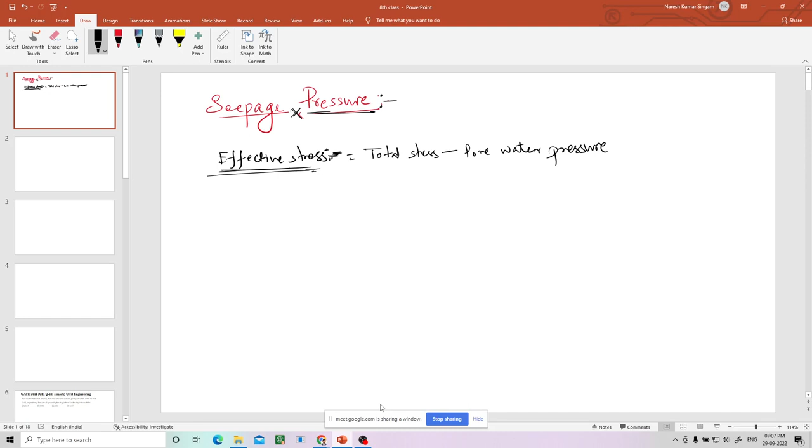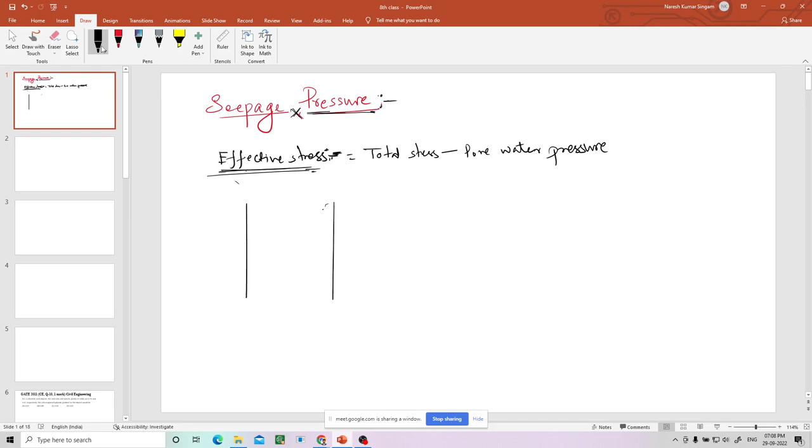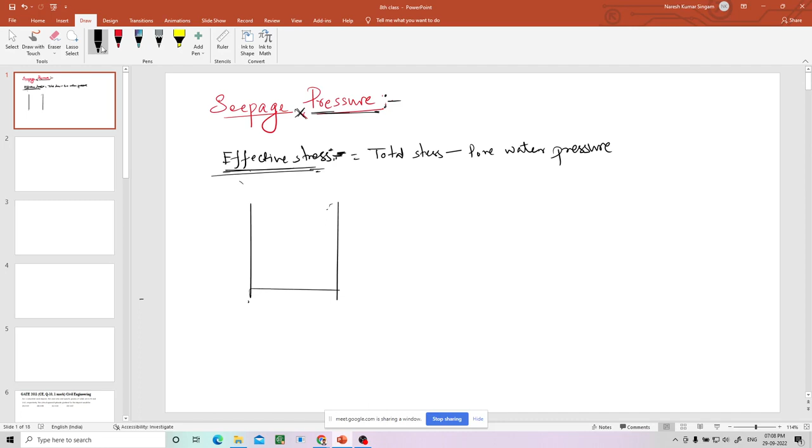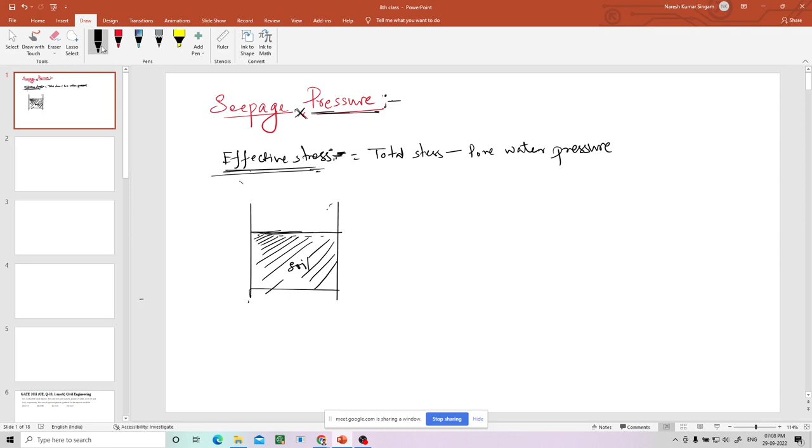Let us consider there is a soil here. This is soil, and above the soil we are keeping some water. This water can flow through this soil because it is fully saturated. That is the reason why you are able to stand the water here; otherwise it would have percolated inside, right?

So now as the water is standing above the soil sample, that means soil is already fully saturated. Now if you go for a tube here, this height, let us say, is capital H, and this height is HW, because this is the height of water which is standing above the soil. Now it is fully saturated.

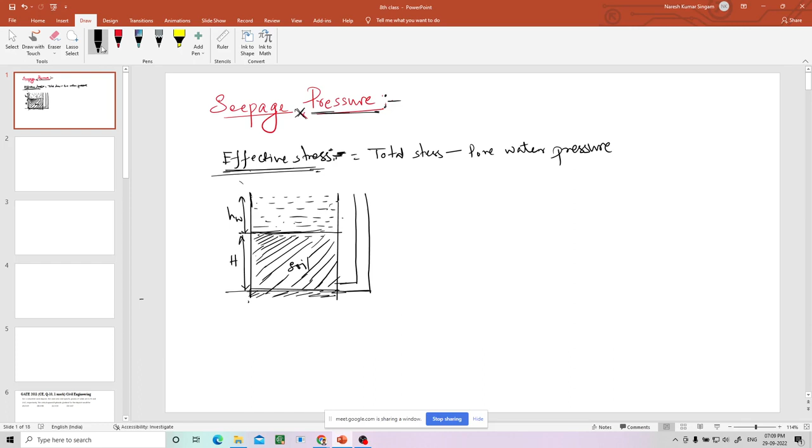Let us take a point here which is A. Can someone tell me it is fully saturated? That also I am writing here: fully saturated, having saturated unit weight gamma sat.

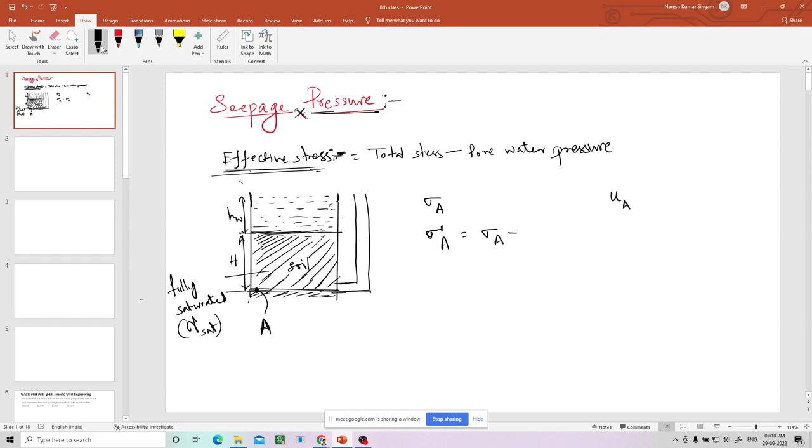Now can you tell me what is the total stress at A, effective stress at A, and pore water pressure at A? So how do you get this effective stress at A? It is nothing but sigma A minus UA, right?

So can you tell me what is total stress, someone of you? You have to respond fast because we don't have time, we have only one hour, within that I should finish all these things. Okay: gamma W into HW, plus gamma sat into capital H. Yeah, this is total stress at A.

Can you tell me what is the pore water pressure? Gamma W into capital H plus small hw. Yeah, this is the pore water pressure.

Now can you tell me what is effective stress? Gamma sat into... okay, so here what should I write, capital H or small h? Capital H, right? So I hope you understood the concept of effective stress.

Now another question from this concept. Now if I put a tube here, definitely there will be water flow from here because it is fully saturated and it is opened. So till where will it be filled in this tube? I don't know up to which height it will be filled, but what is the height of the water which will be filled in this tube?

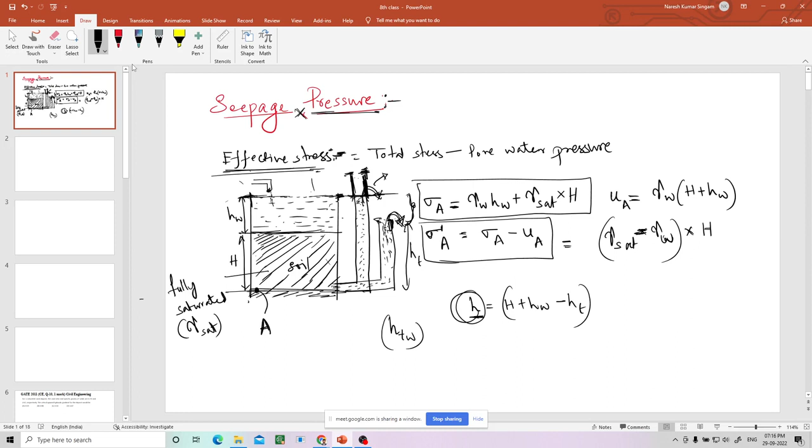Now you understood the basic concept which we should have before going for the seepage pressure. This is called no seepage. Let me go to another new slide. So no seepage we will discuss first. This is no seepage.

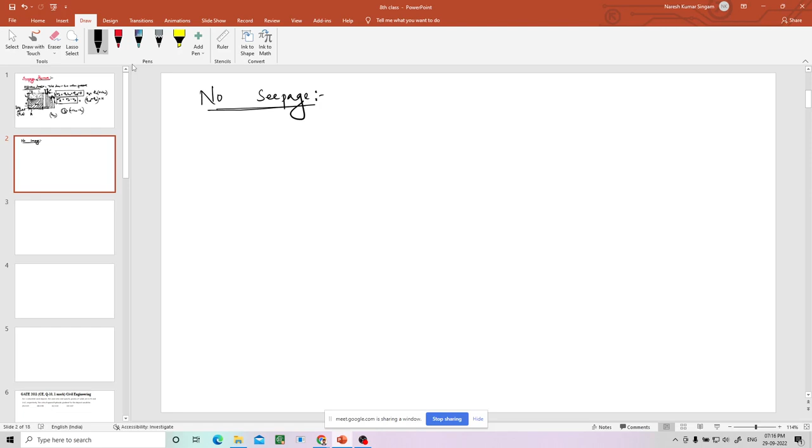But basically there is some water and there is soil. Below this there is completely soil, this is only water. Now I am taking tubes at different levels. The tube height is whose height is more than the height of the sample container. Now the soil is fully saturated.

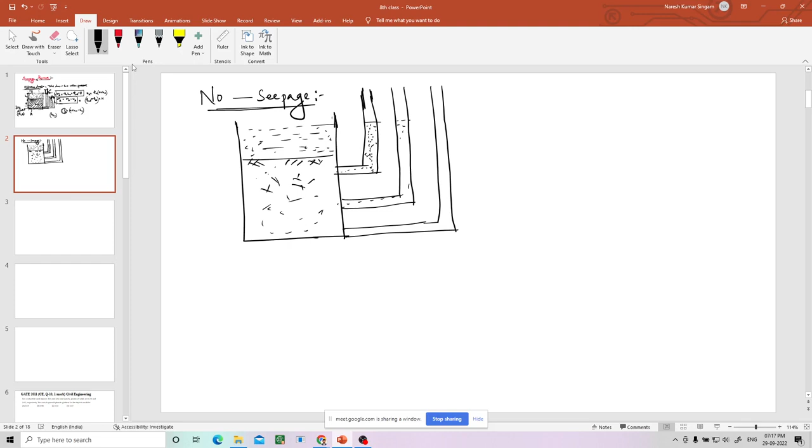As we discussed, the water will flow from here and it will reach up to here only, then here also at the same level. In this case, there is enough space for the water to reach to this height. That enough space means what? This is the space. This tube is having the space. Here also it has the enough space in this tube also.

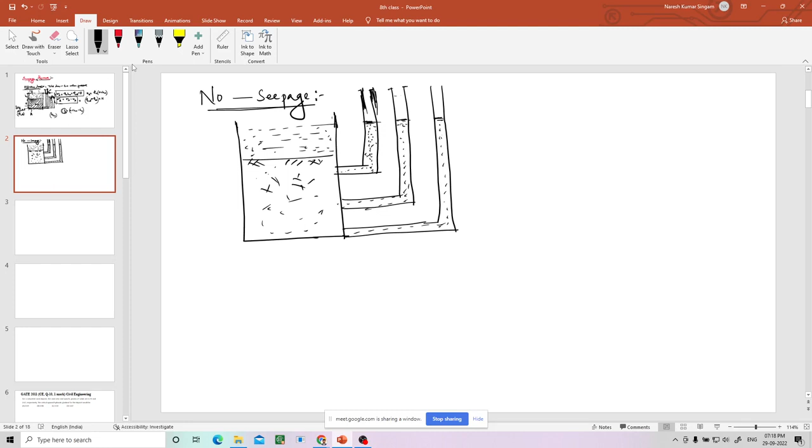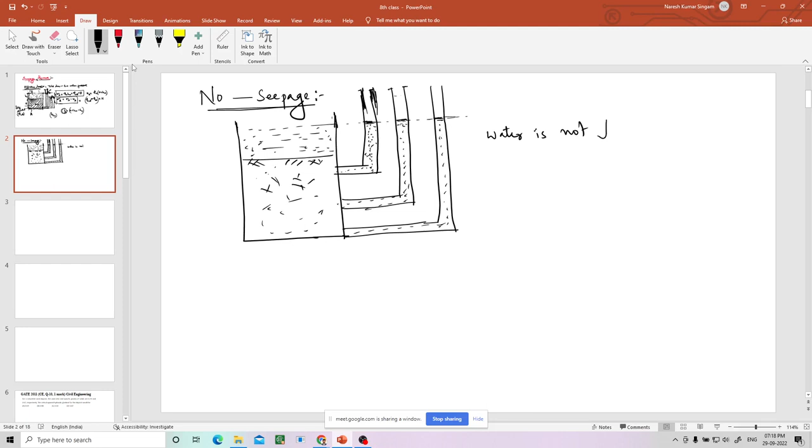It could go up to here if it wanted, but due to the atmospheric pressure which is in equilibrium position now, it will reach up to here and it is at still position now. Here also it is in the still position. So finally after reaching this level, water is not flowing from anywhere to anywhere. So when the water is not flowing through the soil, when it has reached equilibrium position, that means there is no seepage. Seepage is basically the passage of water, the flow of water which is continuously happening through the voids. As it is not happening in the sample, this is no seepage.

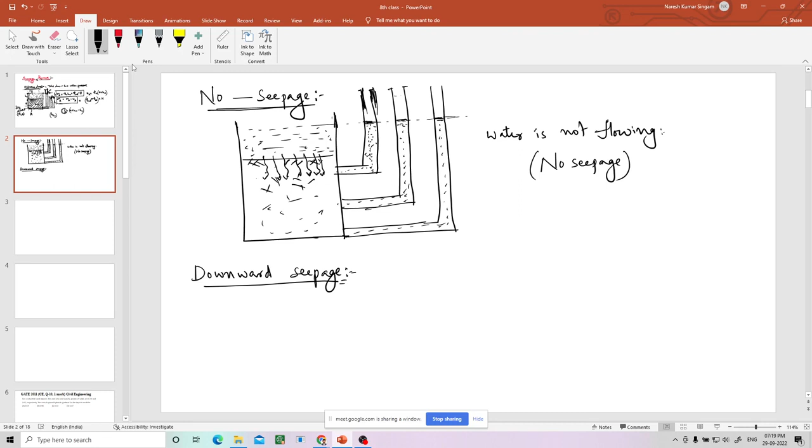Let us take downward seepage. So let me draw, there is a container here, and here I've taken a little larger height. Anyway, let me discuss first upward seepage.

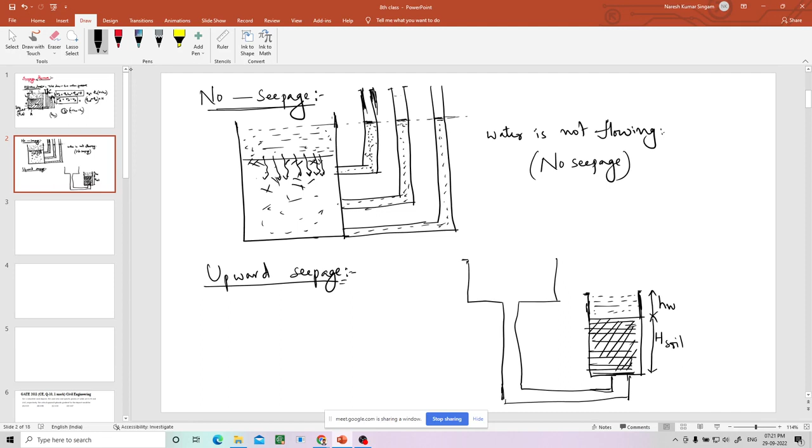Then I'll take soil sample here. This is the soil, this is the soil container up to here, this is the height of the soil, you can say this is capital H. The container height is more than the soil height, so that it can stand some water here, let us say this is small Hw. Now here also we are maintaining constant level of the water in this container, it will not decrease or increase.

It has an outlet, let us say, if it wanted. Now can you tell me, will the water flow? If it flows, the first question is, does water flow here? Second question is, if it flows, what is the direction of flow? Can you reply for it?

Yes sir, so it flows, you are saying. Okay, yes. Then what about the direction? From where to where? Can I get an answer from somebody else?

The flow will be upward. Upward from, can you take the reference of this soil position and tell me? Okay, I'll give you the points. This is A, let us say, this is B and this is C, this is D. Now, from here towards C only.

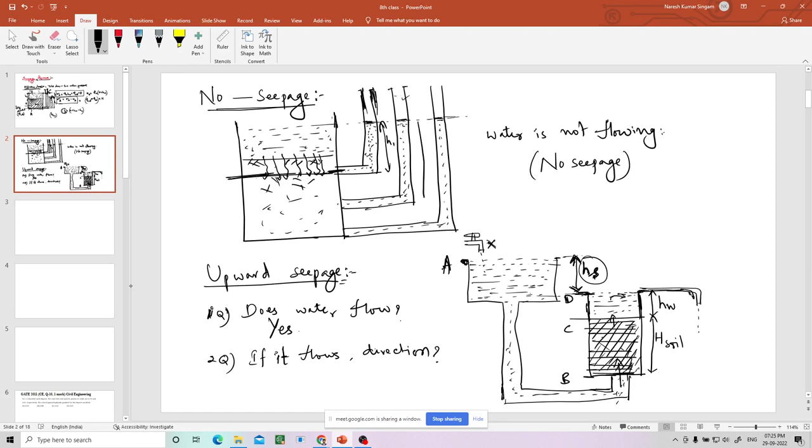So now we know the concept of effective stresses and all. Effective stress is nothing but total stress minus pore water pressure. Whenever you want to know the pore water pressure at any point, you just have to use this tube concept. Just put the tube there and take the height of the water in the tube. Suppose at this point, what is the pore water pressure? Let us say this is H1, this is H2, this is H3.

At this point, what is the pore water pressure? Pore water pressure is equal to gamma W into H1 at this point, because this is the height of water. And what is the pore water pressure at this point? Pore water pressure at this point is gamma W into H2. In this tube, you can find it by taking the height of the water. So this is the first one and this is the second one.

Now what should we find out? See, this is the height of the soil. So now we can stand at this level, right? We cannot go below the soil level. So this is the ground level, let us say. Only we can stand at this point.

And we have to find out the effective stress at any point. Let us say effective stress at this point, at B. At B, what is the effective stress? We will calculate. So for that, what do I do? I'll use a tube concept and put a tube at this point.

Okay, a tube of enough height. Now when I put the tube here at this point, water will enter in this tube also with some water pressure. What is that water pressure? Can you tell me what is the water height in this tube?

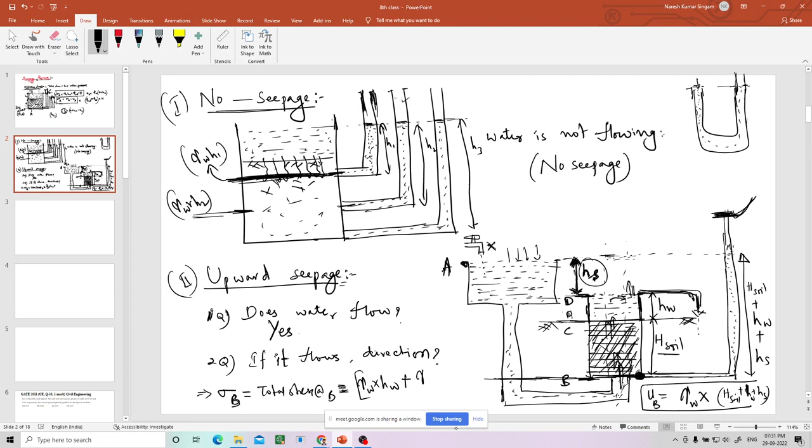Total stress is whatever is above B, the pressure due to gamma W into HW plus gamma sat into H soil. Whenever somebody is asking total stress, it is the stress coming due to whatever it is - it may be water, it may be soil, whatever it is. You just have to take total pressure.

See, I have taken the water, gamma W into HW, gamma W into HW. At this point, whatever water is there and soil is in saturated condition, I multiplied with the height of the soil. So I have taken the total stress which is possible.

Now from there I'll try to find out sigma dash B, which is sigma b total stress minus ub. I know sigma b is gamma w into hw plus gamma sat into h soil, minus ub. ub is gamma w into the sum of all this: gamma w into hs plus hw plus h soil.

So this is the effective stress. Now gamma w hw plus gamma sat into h soil minus, now I'll multiply gamma w with every term: gamma w into h soil. Now gamma w hw, and gamma sat - here this and these are common, so gamma sat minus gamma w into h soil minus gamma w into hs.

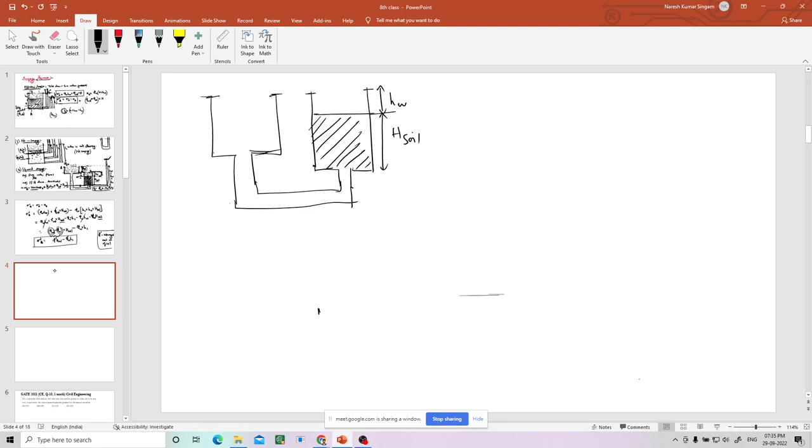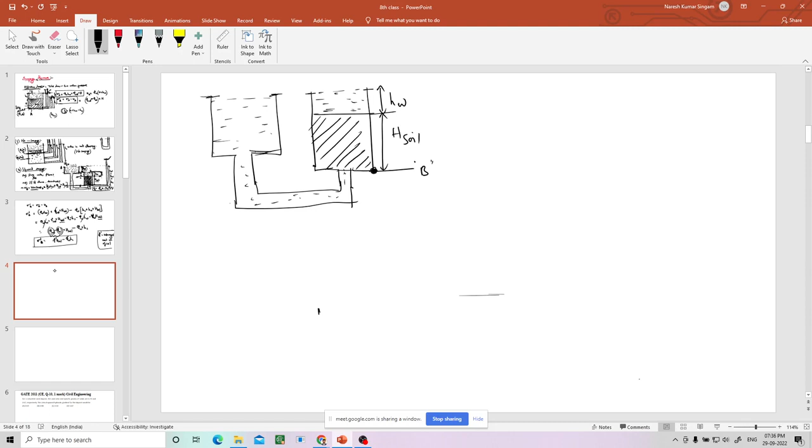Now water is at the same level. Now it is at a still position because both water levels are at the same level. Now if I talk about B, effective stress at B, sigma dash at B is total minus UB. So how to find out UB? I'll take a U-tube and I'll put here. So up to where will water go? At this point, of course.

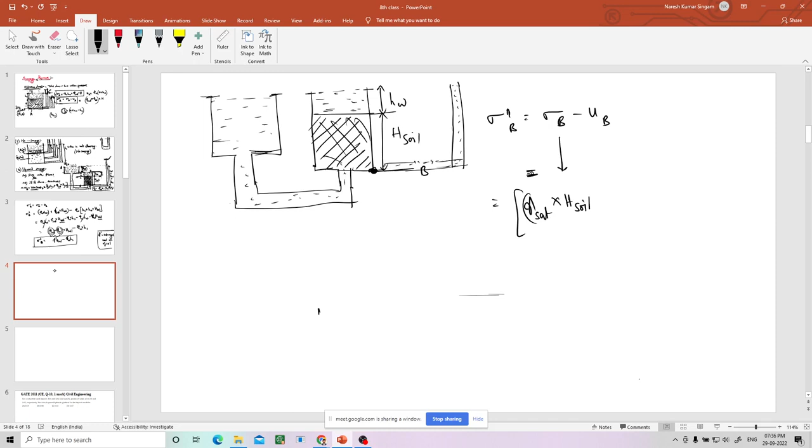So this height is h soil plus hw, and what is the total stress above B? Above B, whatever is there you have to take. What I'll do: gamma sat into h soil, this part is over, and above that there is water also, gamma w into hw, this is the total. And what is the pore water pressure? Minus pore water pressure is this height into water unit weight, this is the pore water pressure. Now these two get cancelled, isn't it?

No, sorry, this is not just okay. I have done... some problem is there.

Can I reopen again? Oh, we have lost that. Let me draw again.

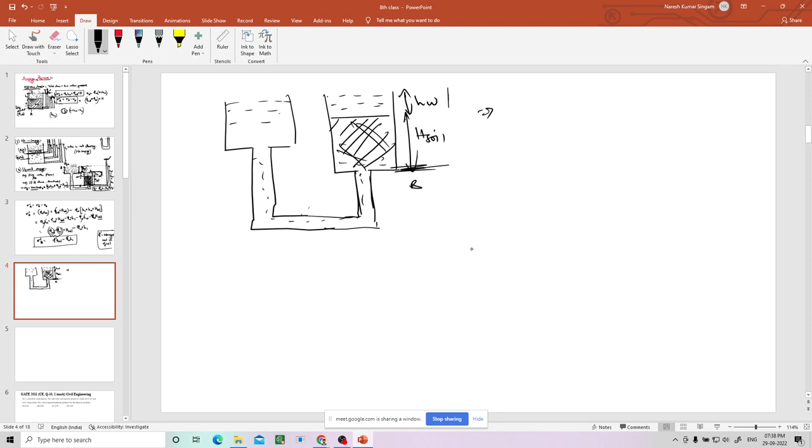There is water, there is soil here, it's soil, there is water here too. So water flows from here to here, and this is HW. As we discussed, this is the B, and at this point if you put a tube, water will go up to here.

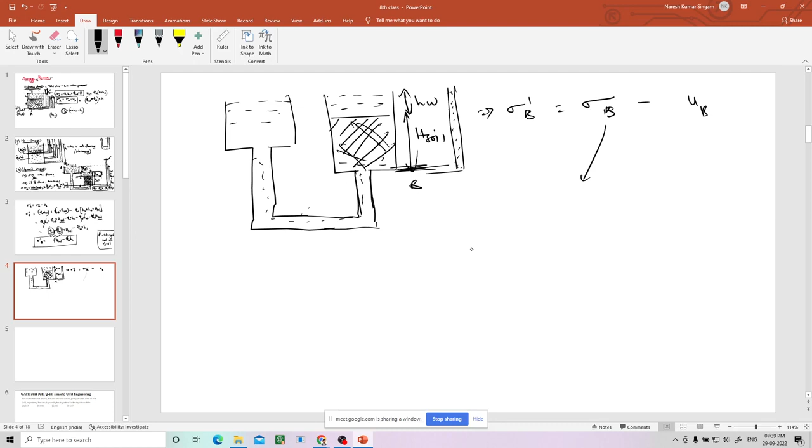Now sigma B minus UB. This is nothing but gamma sat H soil plus gamma W into HW, whereas UB is gamma W into H soil plus gamma W HW. So now this is actually no seepage condition because the water level is same and then water will not flow. So this is no seepage condition basically.

Okay, so gamma sat H soil plus gamma W HW minus gamma W H soil minus gamma W HW. This HW gets cancelled. So gamma sat minus gamma W H soil, so it is nothing but gamma submerged H soil.

So effective stress at B, it is nothing but just that you have to take the submerged unit weight of the soil into the height of the soil. That's it. Submerged unit weight of the soil into height of the soil. Nothing to do with remaining heights. That is the effective stress at B. While calculating effective stress at any point in the soil, like let us say B, you just have to take the height of the soil sample above that B multiplied by submerged unit weight. That's it.

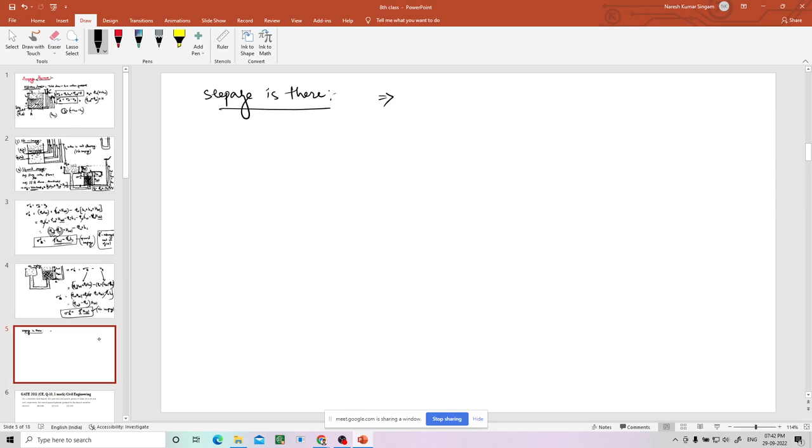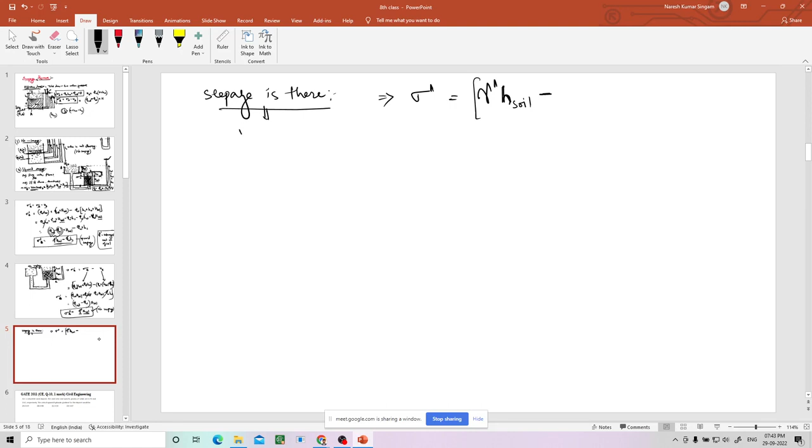So that means whenever seepage is there, let us say, what you have to do, the effective stress will become submerged unit weight into height of the soil, minus - remember this is upward seepage only I am talking about - minus gamma W into the head which is causing the flow. This is the effective stress at any point at height h soil. That means effective stress is getting reduced. We don't want effective stress to reduce, instead we want effective stress to increase, for the soil to be on safer side. Always remember that you want soil to be on the safer side, you have to have some effective stress, it should not become 0. So what happens when effective stress becomes 0?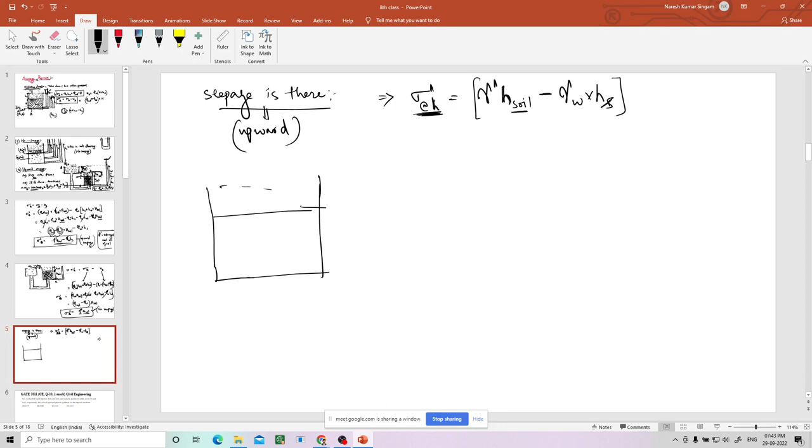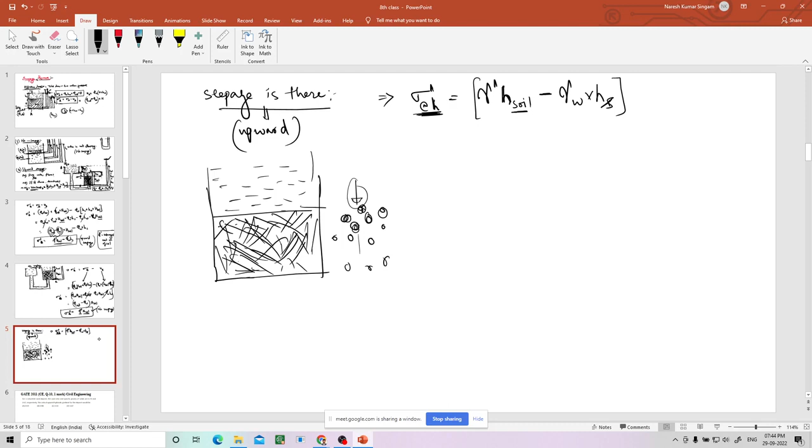Let us take, so there is water, okay, there is soil here. Already due to this water presence, soil is already in the saturated position. So if you keep on adding water, what will happen? This soil particle will try to flow. When the soil particles are trying to flow, that means the soil particles are divided, they are going away from each other. When they are going away from each other, at one point they will of course lose contact from each other, then you can't give any load onto the soil when they are not in contact. If you are unable to give the load, what will happen? If you put any load, suppose you are putting your leg, you will just punch inside. That is the reason, because there is no effective stress. Effective stress is nothing but intergranular pressure or stress.

The pressure or stress which is transferring from one particle to another particle is called effective stress. If effective stress is possible, then only you can apply some load on this soil. If there is no contact, that means effective stress is 0, which is the intergranular pressure. If there is no contact, intergranular pressure is 0, meaning the particles are away from each other.

If they are away from each other, if you put your leg, it will just punch in, it cannot take any load. If you try to build any building, it will just go inside, there will be punching failure. I'll talk about the different kinds of failure in soil in the next class anyway.

So our aim is that effective stress should not become 0. Whenever it becomes 0, that is nothing but liquefaction.

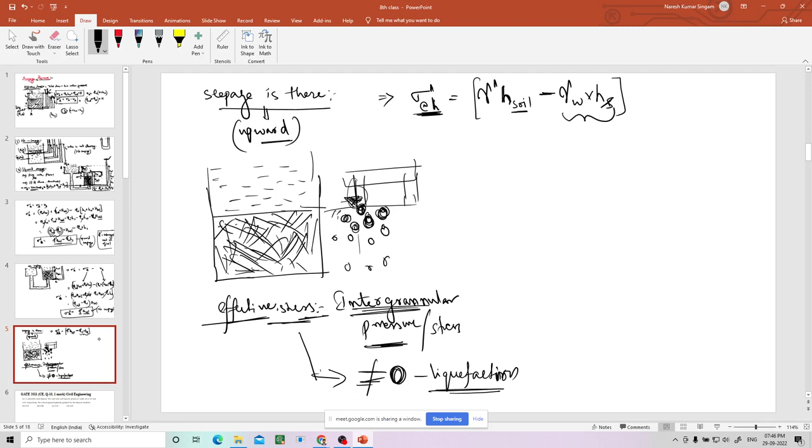Now when seepage is there in the upward direction, what will happen? Effective stress is reduced by this much amount compared to when there is no seepage. Effective stress is just submerged weight into height of the soil, that's it, when there is no seepage. If there is seepage, it is reduced by seepage head times unit weight of water.

Now we will discuss about the downward seepage. How does it matter?

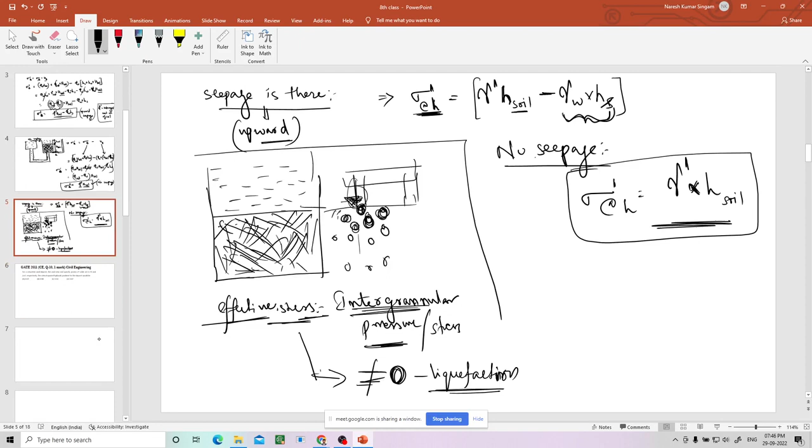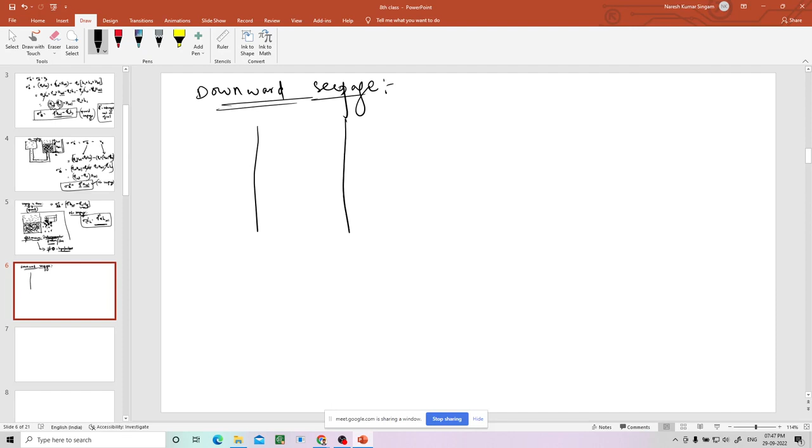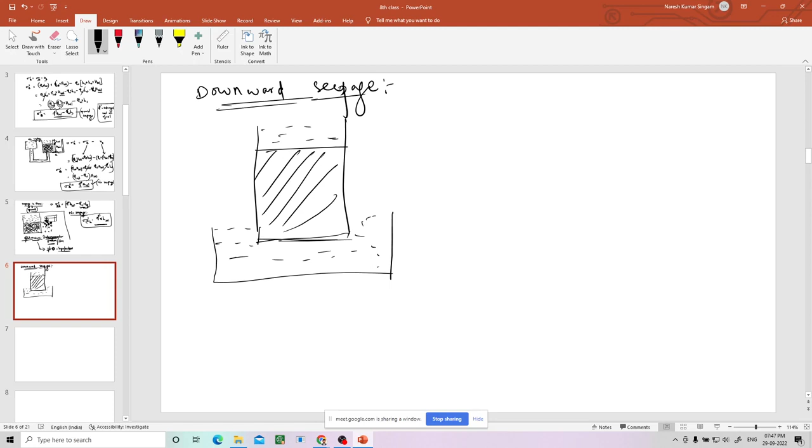Downward seepage. So in downward seepage, when can it happen? I'll take a container of soil, put water here, and there is soil here. Then I'll put this soil in another container, where there is water again, and whose container height is this much only. Now this is the level of water here. Suppose this is A, this is B, this is C.

Now can you tell me what is the direction of the seepage? First of all, does seepage happen? Yes, sir. From where to where? From A to B to C.

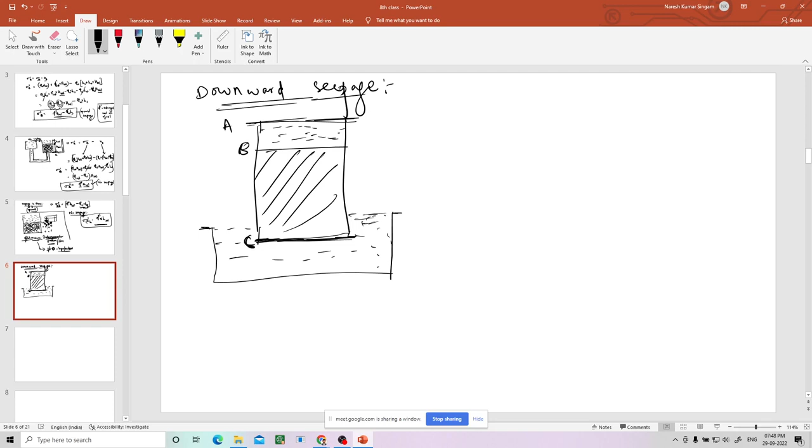From A to B to C, because the level of water is here, it is going in this direction, so water is coming here. Water cannot flow from here to here, it can flow from here to here, because this height is at a higher position, A is at higher position. Let us say this is D, D is below compared to A, so water should definitely flow from higher position to lower position. So water will flow like this.

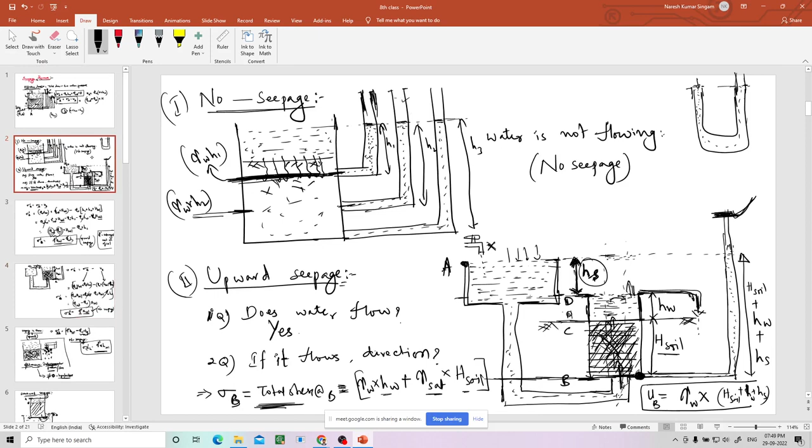Whereas in the previous diagram, water was flowing from B to C, from down to up, because water level is at a higher position there, so it will travel like this, then go like this. Whereas at this point, water is moving directly downward in the soil sample itself.

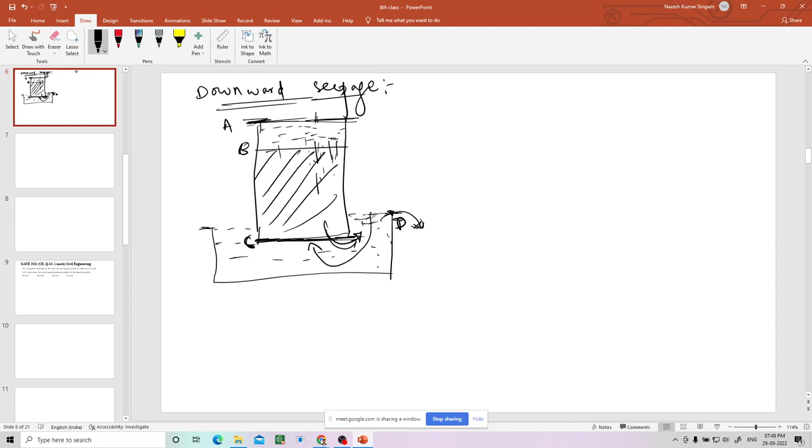This is soil, let us say this is soil. So soil height, let us take this as H soil from B to C, and this is HW, this water. Let us take this as HS, because this is the level difference from A to D, because of which the water will flow.

Now if I put a tube here, up to where will it go? Water in this tube, can you guess up to where the water will reach? Suppose the tube height is like this. Can you tell me what is the water height in this tube?

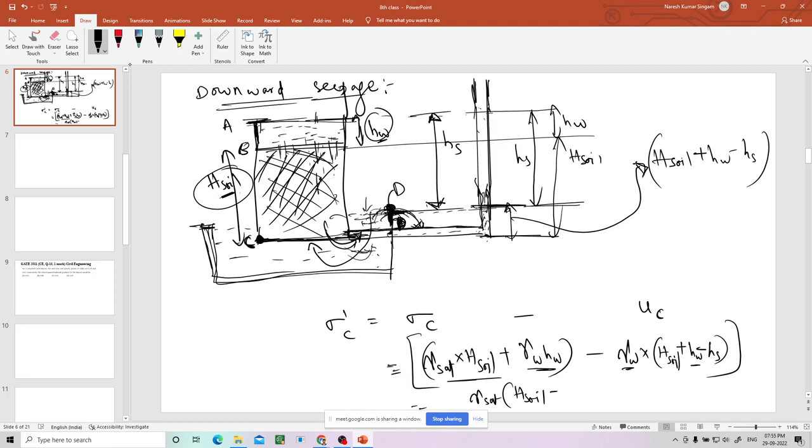See here, HW and this will get cancelled. Now gamma sat into H soil, gamma W into H soil. So I can write gamma H soil minus... I can write this as gamma sat minus gamma W into H soil, and this gets cancelled, and extra minus into minus plus gamma W into HS.

So in the next slide, it is gamma submerged into H soil plus gamma W into HS. This is gamma dash into H soil plus gamma W into HS. So what happened to the effective stress? Effective stress is increased by this much head.

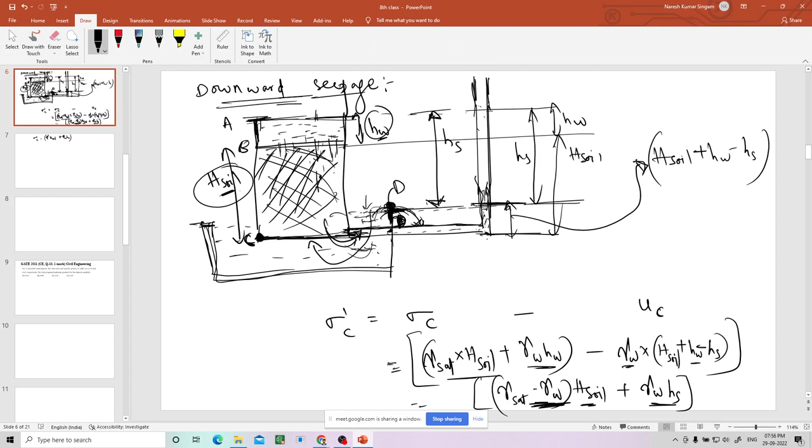Why? The water is flowing from the top to bottom. Whenever seepage is happening downward, then effective stress increases, and the soil behaves as stiffer soil compared to the no seepage condition. So we want downward seepage to happen. Downward seepage is fine for us, whereas upward seepage is not fine for us. No seepage is also fine, it is a little fine, but compared to that, downward seepage is far better because it is increasing the effective stress by the seepage head. Seepage head is HS. That much head is causing extra effective stress.

Now we will talk about the critical condition. Critical condition means what? What is the critical condition? Whenever effective stress is 0, that is a critical condition. So when can effective stress become 0? This is finally the downward seepage formula.

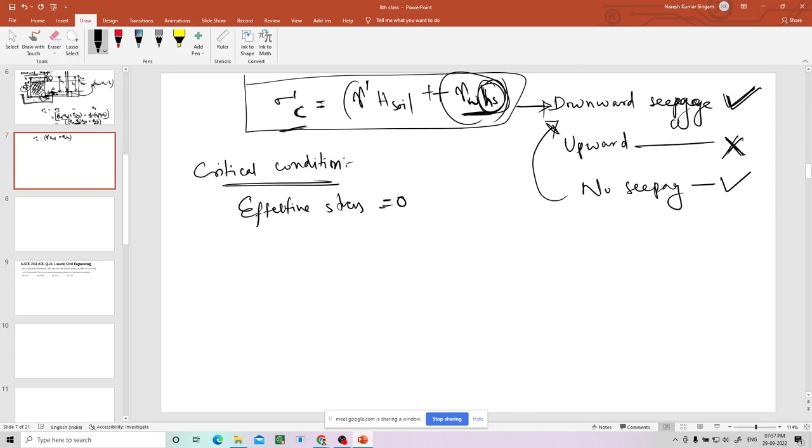You just have to remember that there is always this term: submerged unit weight into height of the soil, whether it is getting added, subtracted, or nothing. Nothing means no seepage, added means downward seepage, if it is minus, that is upward seepage. So finally effective stress can be written as gamma submerged into H soil plus or minus gamma W into HS for the seepage condition. If it is downward, it will be plus. If it is upward, it will be minus. If it is no seepage, this term itself becomes 0, and only the first term will exist.

Now, when does effective stress become 0? Only when this condition is existing—only in upward seepage can a critical condition happen, because in downward seepage there is a plus, it cannot become 0, since something is added. There is addition between two terms. If it were subtraction, we could expect it to become 0, but if there is addition, it cannot become 0. That's why critical condition may happen in the upward seepage condition.

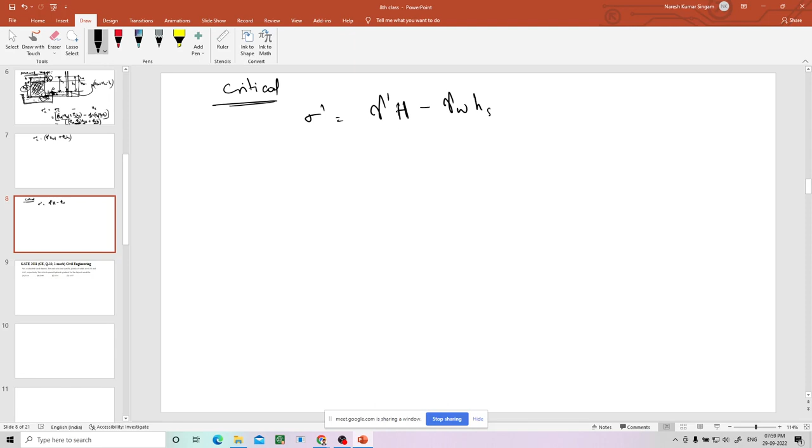I'll take gamma dash H, let us take H only for the time being, gamma W seepage head equal to 0. Now gamma dash equal to gamma W into HS. Then, of course, what can be done? This HS by H, then gamma dash by gamma W.

Gamma dash, what can we write? Gamma sat minus gamma W, right? Then gamma W, so gamma sat by gamma W minus 1. So this is HS by H soil—head divided by the length of water to travel along the soil, that is H soil.

This is nothing but hydraulic gradient. You might have heard this in fluid mechanics too. The head causing the flow, seepage head HS, divided by the length along which it is traveling, is called hydraulic gradient, denoted I. So now I can be written as gamma sat by gamma W minus 1. This is the critical hydraulic gradient, since I derived it from the critical condition, denoted IC.

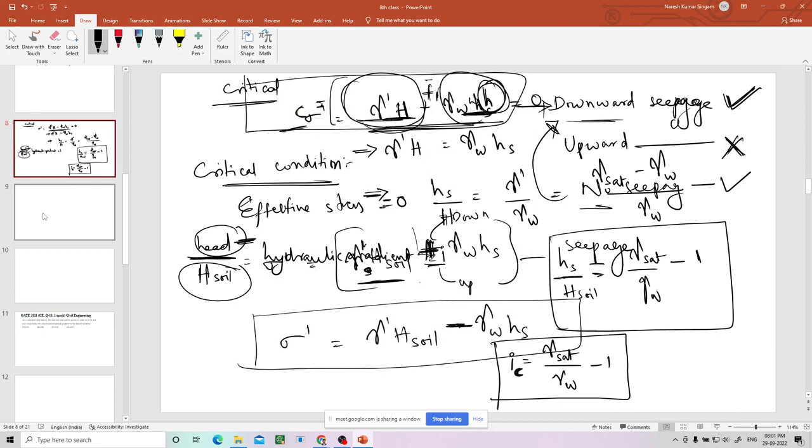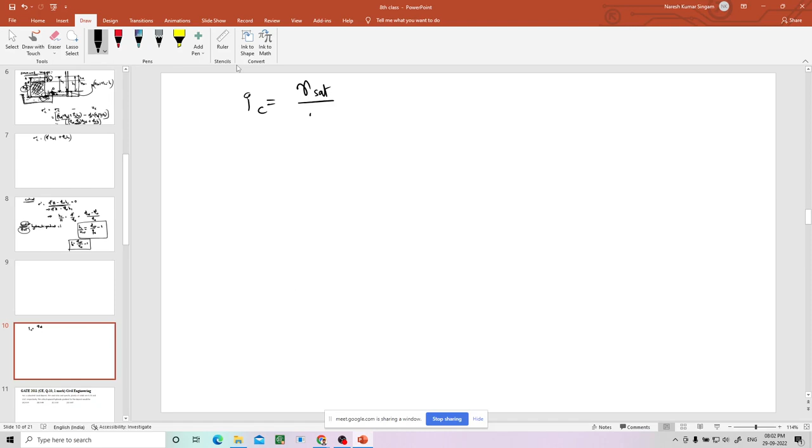Now, if we again look at the hydraulic gradient—there's some problem here, just don't mind—so what is the critical hydraulic gradient? Gamma sat by gamma W minus 1, gamma sat...

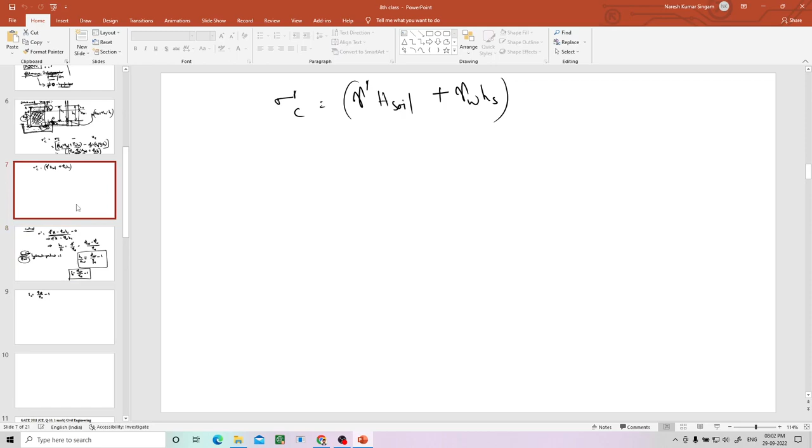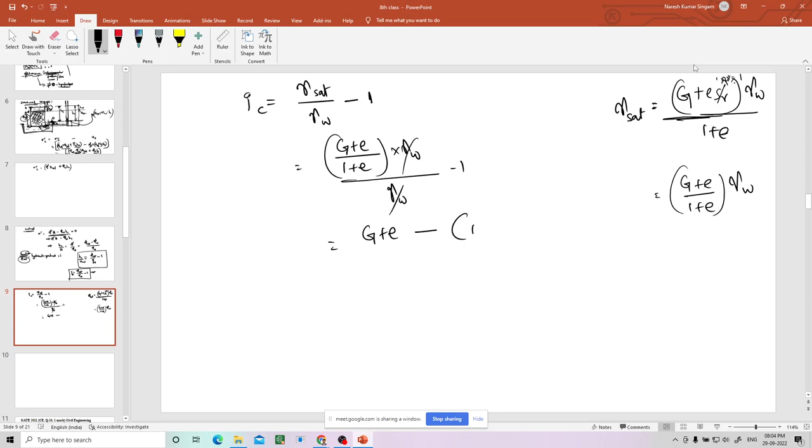Now I hope you can see. Yes sir. HC is what we derived, sorry, IC. In the next slide I have written the same formula. You know the formula of gamma sat from your first lectures: G plus SR times E, all over 1 plus E, times gamma W. Here SR equals 100%, that is 1, so gamma sat equals G plus E over 1 plus E, times gamma W. Substitute this in place of gamma sat: G plus E over 1 plus E, times gamma W, divided by gamma W, minus 1. This cancels, giving G plus E minus 1 plus E, over 1 plus E, so finally G minus 1 over 1 plus E.

This is the critical hydraulic gradient for a soil. This is the derivation: G minus 1 over 1 plus E. Now we will solve a question regarding that.

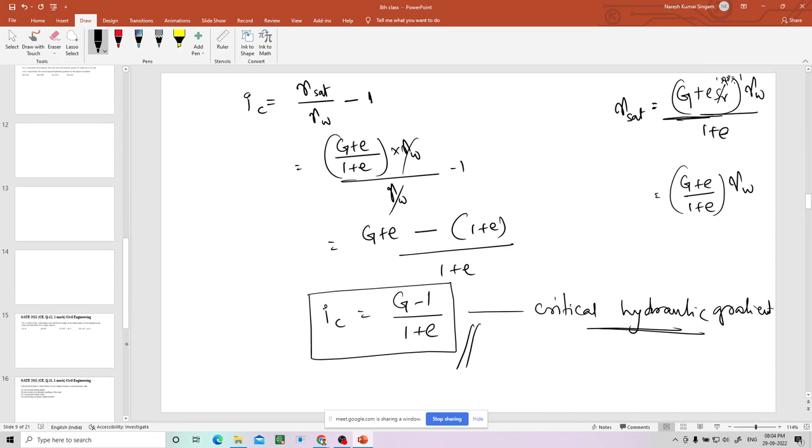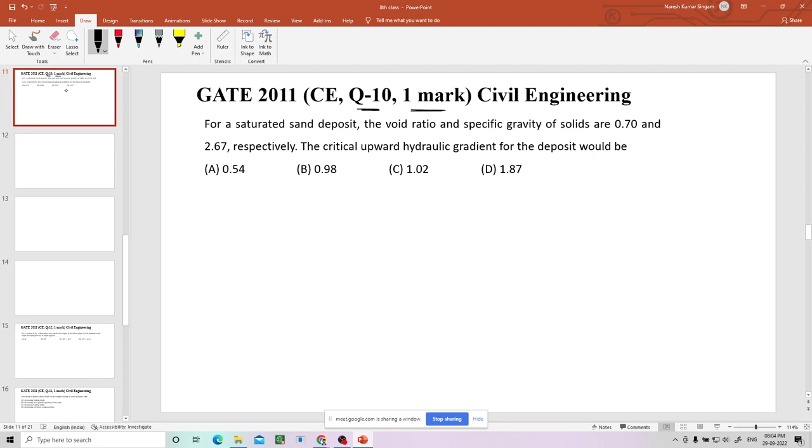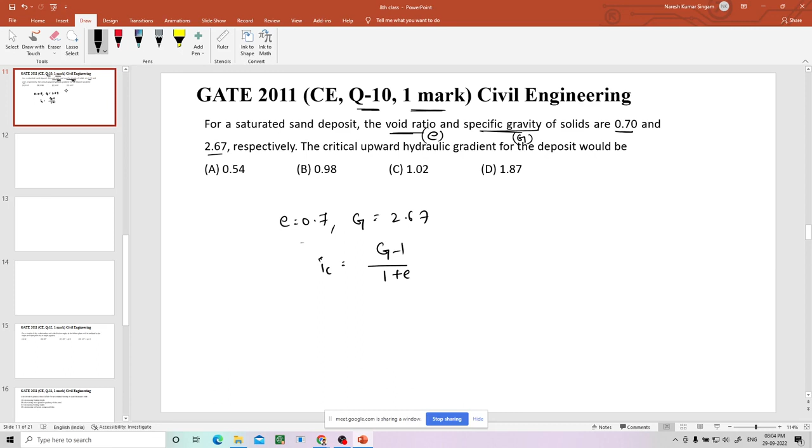In the GATE 2011 paper, question number 10, 1 mark: for a saturated sand deposit, the void ratio E and specific gravity G are 0.7 and 2.67. So E is 0.7, G is 2.67. What do you have to find? The hydraulic gradient, whose formula is G minus 1 over 1 plus E, which we just derived. Find this out and tell me the answer.

Find this out, I'll close the session in 2 minutes. 0.98—yes, so option B is the correct answer.